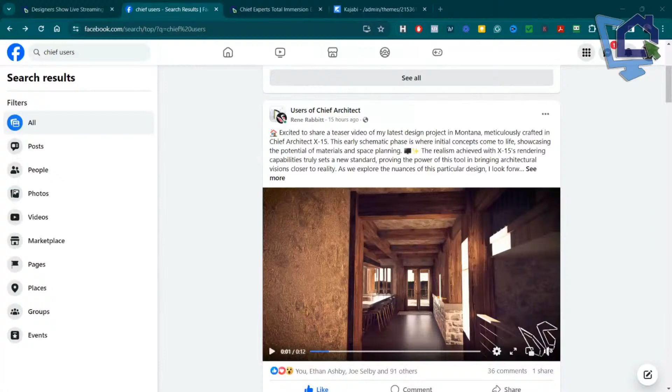Let's just jump right in. I asked Rene if he wouldn't mind talking about this a little bit. I don't know what's the best one of these to do here. Do the overhead one because you got a wide screen.

So Rene, you posted this. When did you post this? 15 hours ago. Let me just play the video. Really cool, it's just 12 seconds long. Now this is exclusive, huh? You did this exclusively in Chief Architect? Yeah.

So look at that. I did put a filter on it afterwards, but it was rendered in 3D. What do you mean a filter? Just like an Instagram filter kind of thing, where it's changing some of the softness and color hues. It puts a little bit more blue into the shadows, for one. That's really phenomenal, I mean it really looks good.

Depending on what kind of device you're looking at it on, it's going to seem a little darker. On my phone it seems darker than it does on my computer, and if I go full screen here it really shines. I'm gonna be switching to Android and have that darker image for me too. Okay, iPhone just shows it super bright. Oh really? Yeah, so it is device dependent.

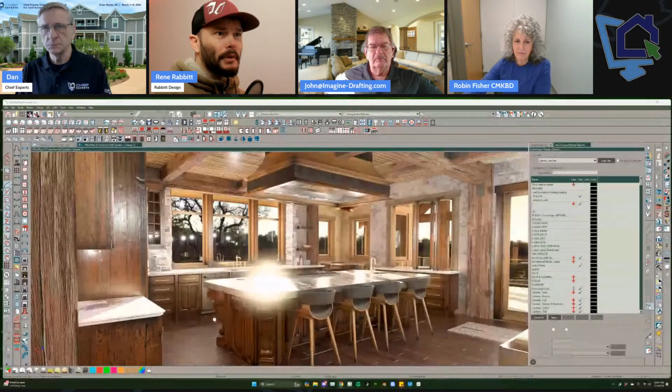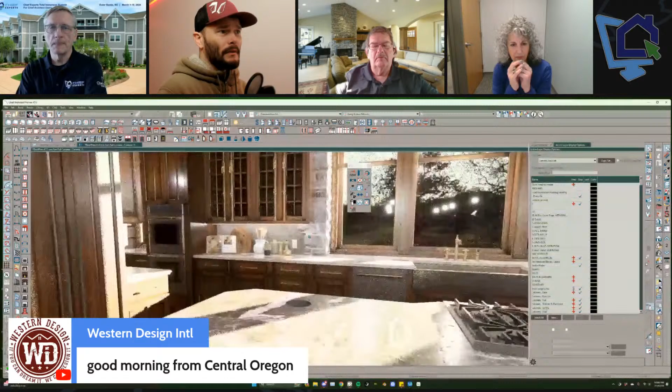Well, here, I'll put it up on the screen. This is actually a collaborative work, and they're in the show right now. Here, this is them, Western Design International. What do you mean collaborative work? So the initial layout of this kitchen is from Western Design, and then I'm coming in to do just some refinements. And this house is gorgeous. I'm not prepared to show the whole house, but you've seen maybe 8 months ago or so, I did a rendering of the exterior of this house. Oh there you go, yeah, it's an incredible house.

Right now I'm just set up to render in the kitchen only. Looks a little bit like the house I did in Texas. My process is such, I don't feel like I'm great at visualizing design until it starts looking realistic. So unfortunately for me, I have to start making materials look realistic before I can even start working, and so that was the process here.

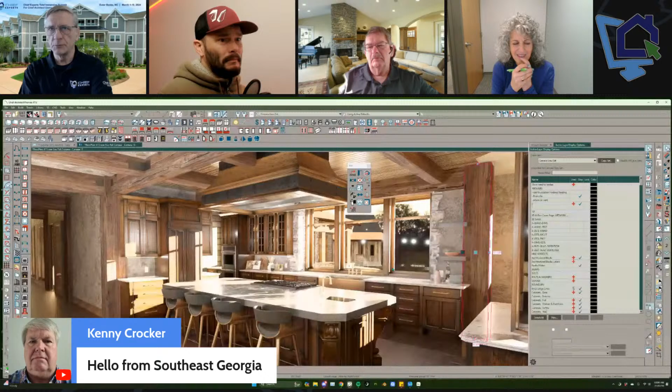I know you are a Photoshop guru. Do you dress up some of your materials in Photoshop before you render? Oh yeah, and I don't think there's a material in the scene that wasn't one I created myself, in this particular one. I was having some fun with it. I kind of picked the hood to start with, because this hood started off looking somewhat similar to this from the get-go, and then I just started putting more detail into it. I did a whole video on how I put together this hood.

So this hood is actually a single fixture now, and it's a fixture as a light, so it actually projects light. If you open it, it's an electrical symbol, and there you go, you can see that there's light sources on it. Have you tweaked the light sources on that? Oh yeah, so we got 3 lights, and they're lined up with the actual lights on the hood, so that's kind of cool.

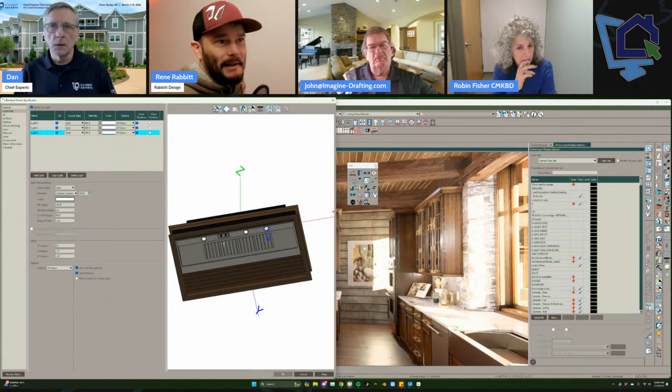And then I mapped it so that it could have a bunch of different textures. So part of the realism in this shot is that even though it looks like I only have maybe 2 or 3 wood textures in here, there's actually like 10 or 15, and they're all just slightly different from the next. Are your beams all one texture going, and they automatically switch direction? There's 2 textures in the beams.

So one is slightly different in hue and offset than the other, and even on the hood itself, this section is a different color than this section, same thing with this inner portion. They're all just slight hue changes, and that really adds to the realism.

People are always asking, what are your lighting settings? I only have the under counter lights on in this scene. So there are no lighting settings, this is all materials. And that's what you've been saying, that you get a lot of lighting effect from materials. So what do you do in the material to adjust that?

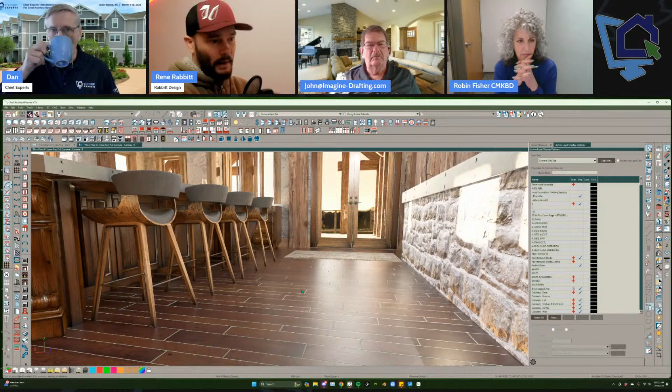We'll give an example, just this flooring. I generated this floor, there's a problem in it right now and I can explain what that is, but I generated this flooring using Dustin Cruz's Substance Player that he's got on Chief Talk forums. When he was first making that, I asked him, hey, can we get a picture input, an image input, so we could take wood off of the internet, a picture of a slat of wood off the internet, and chop it up. So that's what this does.

Here's a quick trick to address right now. If you have a high enough bump or normal map in your flooring, what's going to happen is the surface underneath is going to show through. And that's what's happening right now, is the reason these are all light, because the surface underneath this floor is actually showing through.

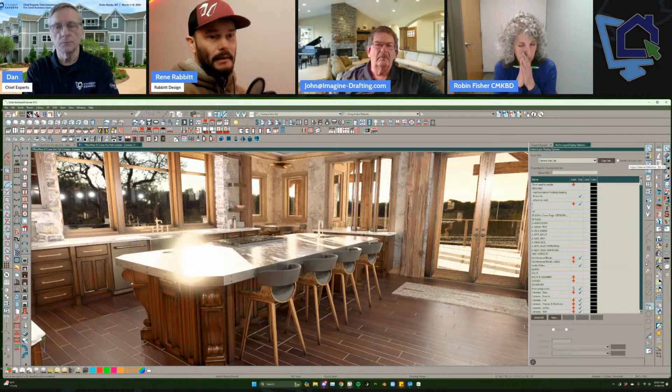A normal map or bump map is kind of an image that sits on top of the photograph of the wood, so it's a stack of things. A bump map would be a grayscale map, black to white, where maybe black is an indent or depression, and white is a raised surface. So that makes the slats stand up.

And then on top of that, I'll put in something. If I just get in where I keep my materials on my computer, I'll put in any number of things from various locations where I've always got generic bump and normal maps. Here's where I might put in a wood texture into the finish of that material. I'll show you what it does real quick. We'll take the material picker, we'll pick this up.

For a roughness map, the black, it's also a grayscale map. Black is going to be true gloss versus white's going to be a matte finish. So if I go in here and pick something with kind of strong contrast black and white, I'm going to pick this one, you're going to see this show up real quick as soon as it finishes. It has all the knots in there. And so as the light hits it, parts of this are going to become gloss.

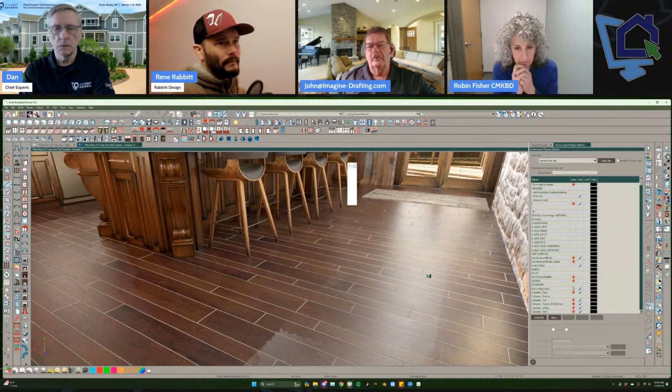How much time do you have into that, Rene? I spent 2 days working on this.

So there's that bump. You can clearly see those are the rings here. And something to keep in mind, the resolution of the original texture, you'd have to have a texture that matches that resolution, or understand that your bump map's going to get stretched according to the resolution of the texture map. So the bump map I just chose is a real small truncated image, and it's getting stretched because the main map is a different size.

Got it. And then just to mess around and show you what happens here in our structure, floor finish, let's look at what's happening. You see this foam right here? Let's see what happens if I just change this material. Sorry, this stuff moves slowly when you're working through it.

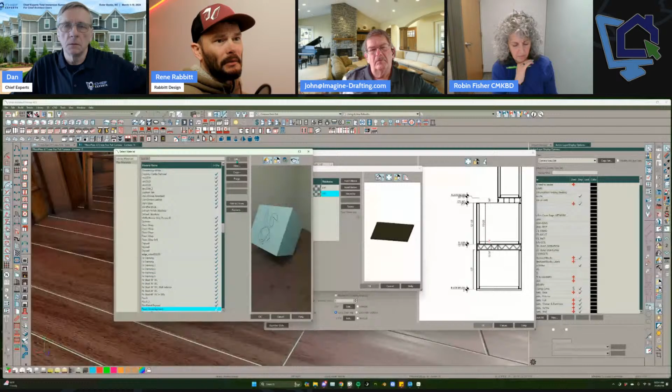Probably because I'm in a ray trace mode. So I'm going to edit this material in the pattern section, and I'm going to just turn it black. And now that's my new surface texture, going to be black underneath this flooring texture.

Here you go, Rene. Comments. That's super funny, I agree with you, John. Most of the time I'm like, you're up here, bring it back down. There we go, you see that? All right, we all feel the same way, John. You're not alone. But it's fun to see this stuff, to know that there's this kind of crazy stuff going on in the background. And thank God we don't have to know much about it. So we have guys like Rene that are going to take care of it for us. Yeah, come hire me. You changed that bump map for that area.

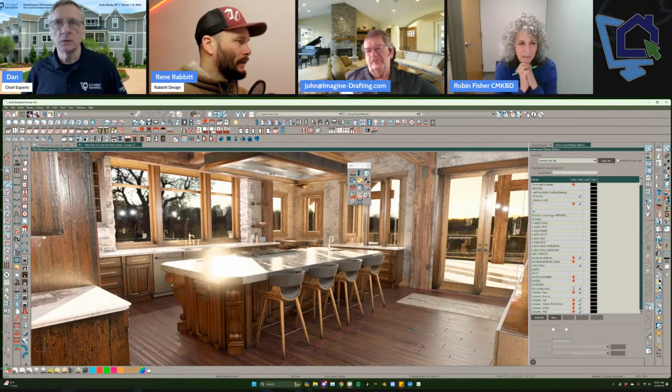Is there a way to show a different pattern, different bump map for another plank right next to it? Can you put two bump maps in the same material, or no? You'd have to split the floor, put a floor material region in there or something like that. Which we showed last year at the summit, how to do a banded edge inside. Yeah, we talked a lot about that stuff. I almost just do it in camera view, where we're picking a slat and then putting a material region and matching the slat of the floor to actually do a banded edge, to get the width and that kind of stuff.

But it's cool to see that Chief, I mean, is really getting there. This is pretty amazing. Well, big hats off to the Chief dev team. I love the team that does the rendering, and I was talking to them in Idaho. I had a big back and forth with them over a series of months just about rendering stuff coming in next versions, and I'm super excited to see what happens at KBIS. I want to see it actually implemented. Yeah, so this stuff should only improve in the next version. Yes, absolutely, and hopefully be user friendly. I know you guys are speaking a foreign language, but yeah, user friendly. Yes, all right, so cool.

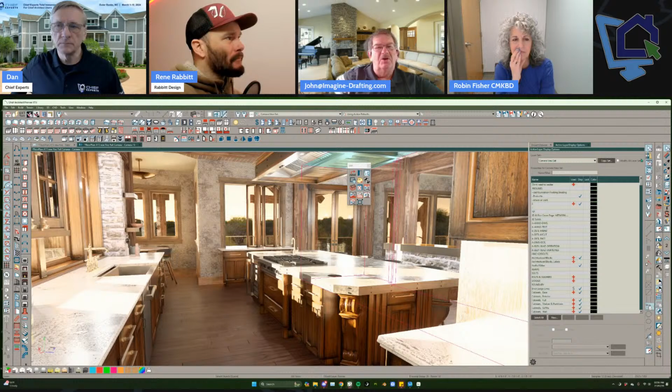Rene, one of the things I struggle with when I'm trying to do something like that is hunting for stuff in the library. What do you do to keep it straight so you don't have to search all over the place to find what you want? I make sure I put search attributes on everything. So if we're zooming in on my library browser, if I type in RD Wood, which is Rabbitt Design, that means I'm looking at my own textures and it shows up pretty quickly. These are things I've made. So that's part of us taking our brain cells a little bit further when we're picking out that favorite toilet we like to use. Let's tag that damn thing. Tag it, putting it in the library and keeping your library straight so you can find it.

Well, you don't even have to do that, you just tag it. Can you just tag it? Yeah, you can tag it. Tag works. I do what I call a stacked tag. So my stuff is all — if I want flooring material for interiors, I'm going to click on interior, I'm going to click on floor, and I'm going to click on material. And it's going to get me there.

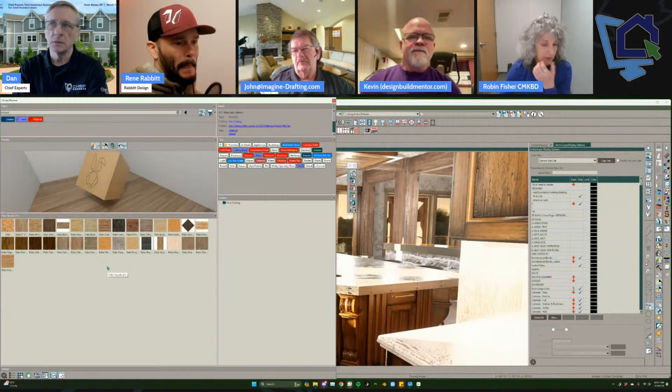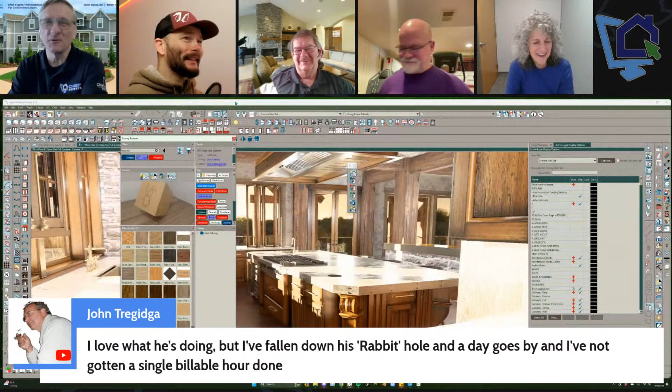All right. Look what I've inspired. Yep, I love it. Nice. No, this is cool, thanks Rene. We need to move forward. So yeah, organizing your library is just — I keep forgetting to do that myself. I go look for a toilet and it's like, god dang it, why don't I just, because I use it all the time. Yeah, stop and organize it. Well, and just get in that habit.

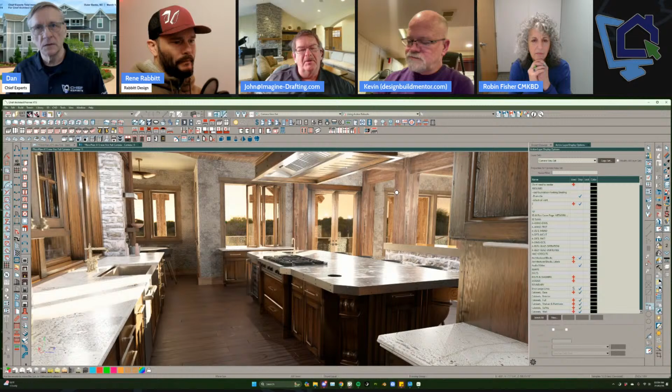Since we're talking about the library a little bit, pull up your plan, because I'm starting to think about using the library in a different way. I don't know if anybody else is doing it or not, but can you pull up a plan, Dan, or just draw something quick? Sure. I'm starting to use find in library a lot more. Let's see that function, yeah.

So you want a new plan? So what do you want to do? So just grab a wall and go to find in library.

This one, bottom right, this one's the magnifying glass. Yep, this one right here. So it's going to ask you to put it in the library.

You probably don't have it in there. So if I put it in there, that brings up my library, which I have expanded. So one thing, if I put all my wall types that I want to use in my library under a wall tab, it will open up that tab so I can just go there and grab my wall.

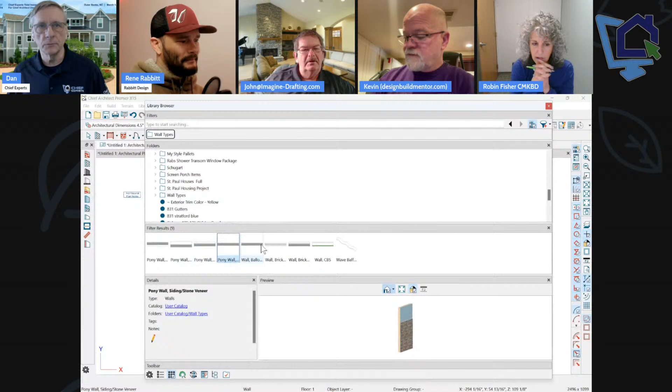Right, so there's my other walls. Yep, so but if I'm going to use the find in library, I have to work from my library all the time. I can't go up to the wall tool and use that.

But as soon as you click on that, go back to the plan now and click on the middle wall and find in library. Oh, find in library. All right, and now start drawing. You ready to go? Yeah, because it opened it in the library here. It opened it in the library.

Same thing here, if I want to use this wall, I find in library. That's clever, John, I like that. Yeah, so then since it opened that tab in the library because I clicked on there, found in library, so if I do that one, now I'm ready to draw. And if I do this, hit find in library.

I thought I did that. Thought I did. Oh, well. Well, you selected a different one. That's why I say you have to work from the library if you're going to do it.

Oh yeah, so I should select the same wall. I should be selecting my walls from here then.

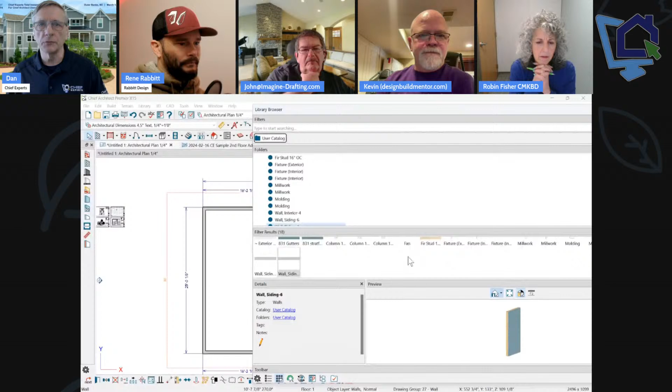Yeah, right, okay. But you don't have to open the library because you can select a wall that's in the library and find in library. Sure, and then it brings you to that tab. So then you can change the wall that you want to use and start drawing with that wall.

Yeah, nice. The other one I do kind of the inverse of that, but I'll draw a new wall and I'll just set it as the new default. Then I'll go back to that, but that takes one more click and work to do. I mean, that's one thing, I'm trying to get rid of clicks, right?

Well, wait, no. He would just click on set as default in the toolbar. Oh, I see what you're saying. So, if I'm saying, so I keep flipping defaults.

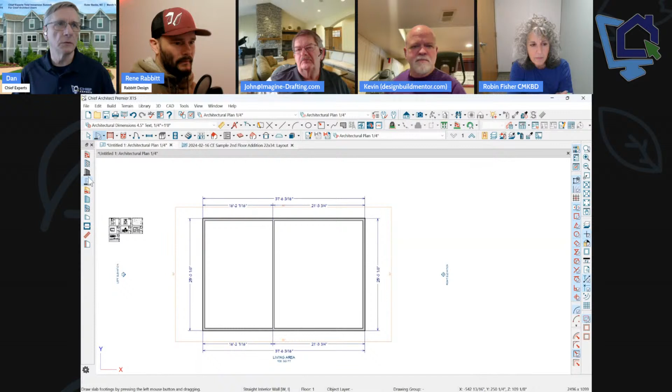So if I switch my interior wall type, well, let's go add another type of wall. I'm just screwing around here. So there's a foundation wall, but I want that to be my new interior wall type, so I can draw more interior walls. You'd have to have it drawn in the interior though. Oh, that's right, I forget about that.

Right, thank you. The other thing you can do, if you highlight that, this also brings up doing as-built versus new stuff. You can take that wall and make it an as-built wall and put it on your as-built layer, and it will be on that layer when you put it in there.

I'm a big fan of putting interior walls on a different layer than exterior walls, so you can turn them all off. You can do that too. Yep, yeah, I do that too a lot.

Here's a big one for me, Dan, when I'm working through as-built. Select your interior wall, the middle dividing one. Open that up. And then right there where it says thickness, just add 2 inches to it. Just go plus 2.

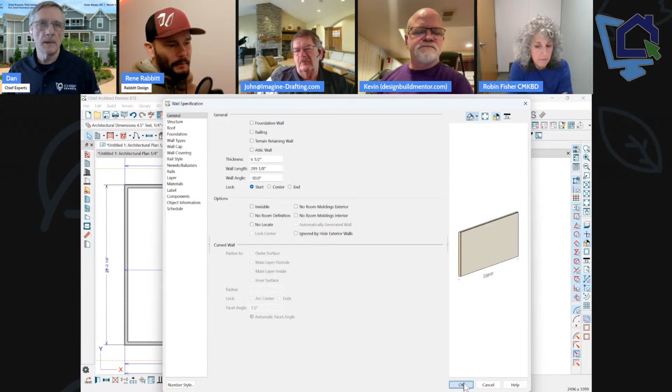So for those that didn't know that, if he presses OK, that now generated a new wall called interior 6. And that's when I'm like, I'll set that as default. Now I'm just drawing with interior 6.

And then I can... so why does it do that on an interior wall? But if I do that to a railing wall, it doesn't change the wall type, it just adds the thickness to it. That's interesting, I didn't know that.

Yeah, so like if you go out and put a railing on here and you want to do posts, and you want the post to be set back a little bit, you would just take this wall type and add to this. If I make that 8 inches, for example, it's not going to change that into an 8-inch wall type, but it does. Let's look.

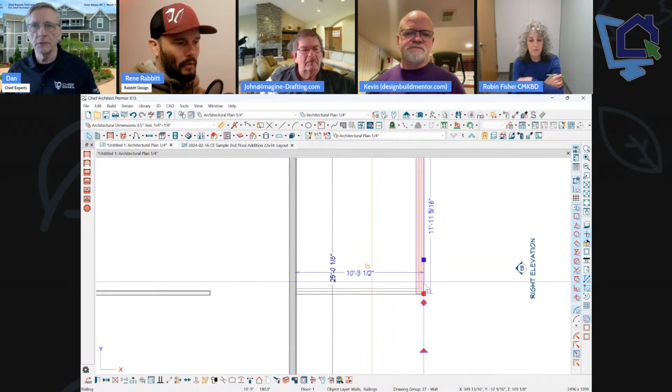What is the wall type? Let's see. Well, I had railing selected. So the wall type, yeah it changed. Look, it really changed now? Interior railing. I didn't know it did that. I just learned something new.

So are we done with the walls like that? Because I have another issue I want everybody to let Chief know about so they'll change it. I thought we were spinning wheels, not dealing with issues, John.

No, go put a window in there and do the same thing. Put the window in the railing or the wall. Put a window in the wall. Add that to find in library for your window. Add it to your library.

But see, every time you click on it, it's going to come up with this menu. I want it to at least hold the window and not bring this menu up unless I want it. This does this with any fixture - it brings this up instead of just grabbing the object and letting you use it. You have to select what attribute you want to use because it's adding it to the library first.

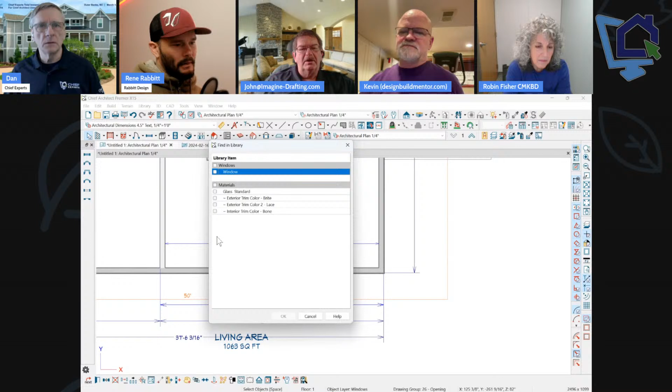Well, it'll bring it up when you do it again. Let's just do it that way - put it in the library. Okay, so now it's in my library right there. Yeah, that function comes up because I use that all the time for cabinets where I'm working on other people's plans and I want the cabinet door that they used.

Well, so it's just like your walls - you'd want to be working from your library to select that window. So can you put a window in there from the library and see if it'll let you find it in the library without bringing that up? I just put this one back in. Now select that one and find it in the library.

Yeah, the same thing - see, it brings that back up again. Yeah, I don't want it to do that. Well, then don't use that icon.

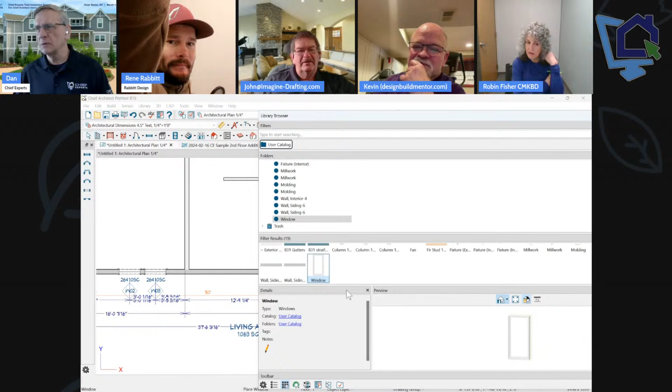But it's so handy. I can select that window, find it in the library, and go to the next floor and put it in. Yeah, no, I get it. Well, there again, wouldn't you just work from your library of windows? Well, I suppose if I had it open all the time, but this actually sorts my library when I click on it.

If you changed it, if you put your tags in there, you could do casements, double hungs, those kind of deals.

Yeah, I haven't been paying attention to the comments. I hadn't seen if anybody's saying anything here. Okay, anyway, all right, cool.

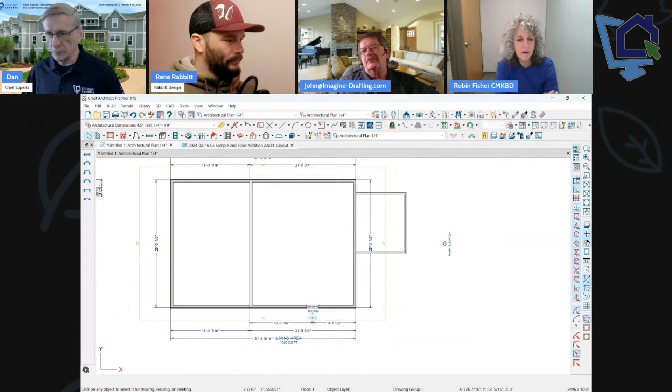I suppose we could just keep doing this kind of stuff. Let's go spin the wheel because I put all this cool stuff on there. Yeah, you did. So no icons today - let's just do this and spin it up and see what it lands on. No icons, you're slipping. I know I am.

All right, as-builts. What did I want to say about as-builts? I made notes on that so we wouldn't forget. Where did I put my notes now? Here it is - as-builts. Anyone using Canvas, Matterport, or any other scanning software?

Matterport just put a big update out that I didn't get a chance to watch. Any of you guys see what their update's all about? What's new? No.

Let me go to the website real quick and talk about this for a second. If anybody's used the new Matterport or had a chance to try it, they have a really cool feature where you can click on a room and it shows you all the dimensions around the room, height, everything, just by clicking on the room.

So this could be huge. They're getting dimensions on there now, so we don't have to go measure everything. That's cool. I really like that. So if you guys check out Matterport, if you can find someone in your area who can use the new Matterport 3 camera, have them go scan something.

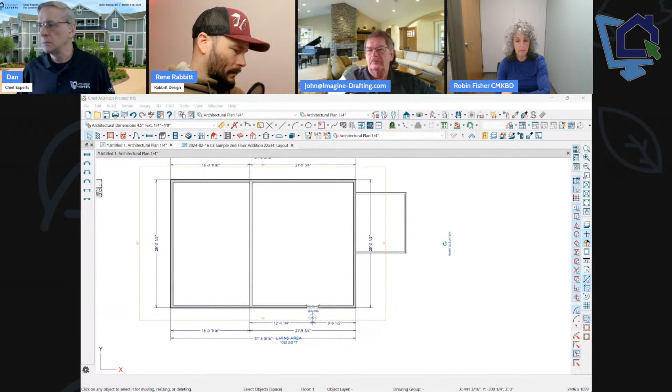I have this, I've only used it a few times, because I go measure on site and draw it on site, I don't really need this. I have it in my contract that says you have to do an intake form with me and tell me which floor is priority, because I will prioritize that floor over every other floor. So if the dimensions are off from floor to floor, I'm going to pick one floor and say everything's going to be built off of this one.

Makes sense. Cool. It'd be great if one of us got that Moasure device so we could start sampling it at the summit. Chad has something different, I think. I haven't tried it, I think Chad has Moasure too. Does he? Okay, maybe we can find out more about that at the summit. Chad, if you're watching, bring it. I don't think I saw him on here yet. Okay, well we'll talk to him, I'm sure he'll bring it.

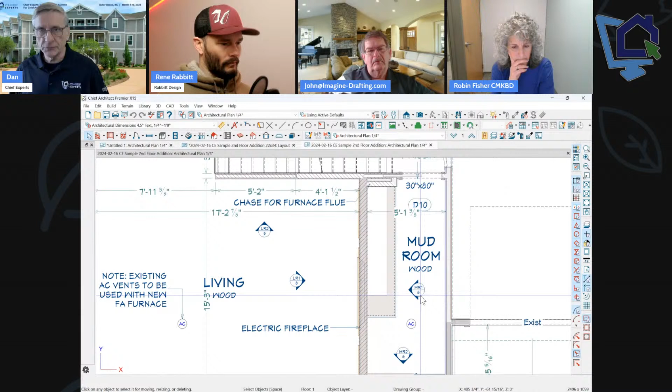The callouts in Chief are used to find things in your plan. So if I'm on my floor plan and I'm looking for an elevation of that mudroom, I'm going to go here and say, using the initials of the room, mudroom 1, and it's on page 6. So mudroom 1, page 6. If I go to my plan, go to the layout, there it says mudroom 1, and down here it says page 6.

So I'm not going to duplicate that page 6 in the callout here, I see that a lot, but I don't think it's necessary in my mind. What do you guys think? No, I don't think so either. Right, so just do that.

So anything that's got an elevation or something that needs to be found somewhere in your plan from the floor plan, like MR2 on page 6, section 4 on page 14, section 1 on page 14, living room 2 on page 6 - those give us the indications on our plan where those details can be found. Callouts are fairly simple in their sense, but there's still people that don't quite understand what they do and how they work.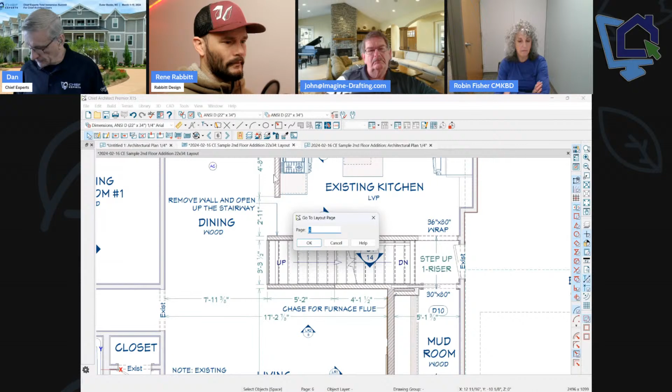The key with Chief is we want the page number to always update automatically. If I were to go to page 14 on this layout - here's my sections, section 4 on page 14 - I'm going to click on the page number and I can type in the page I want to jump to. Here's my page number.

So now if I go into my pages here and decide I want to add a couple pages in here, or move this page down to after page 16, now the page number is 16. So when I go back to the floor plan, now that callout will say page 16. It's automatic, so I don't have to keep track of anything to keep my callouts up to date.

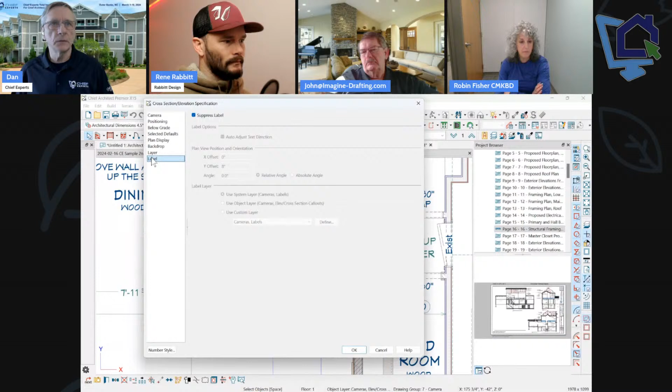Does that make sense? Now, if we look inside a callout and look at the dialogue, the way you make that happen where the page number is automatic - you're going to go to... hold on, where am I again. I'm going to go to camera, and then plan display, not label, plan display. What shows up on my floor plan?

If we look at this menu, I've typed in S4 right here, and that's what shows up at the top of my callout. This one, I typed S1 into the top of that. But the page number is set to automatic.

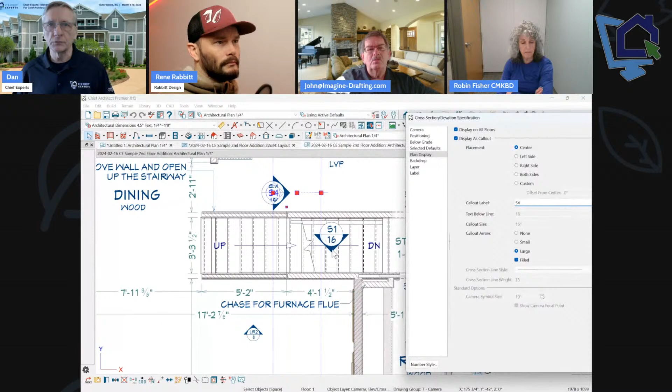It's set to automatic. So there's your page number, you see it says 16 here. I didn't put that there, it's automatically put there, and that's what will show up in the bottom of your callout. So where does that page number come from?

So if we go back to the page where that callout, where that section is, if I go here and click on this section and open its dialog box... no, I don't want to go live, I want to go edit the page. So I'll right click on that detail, and I'll edit. Well, this is the page, okay, this is the page number.

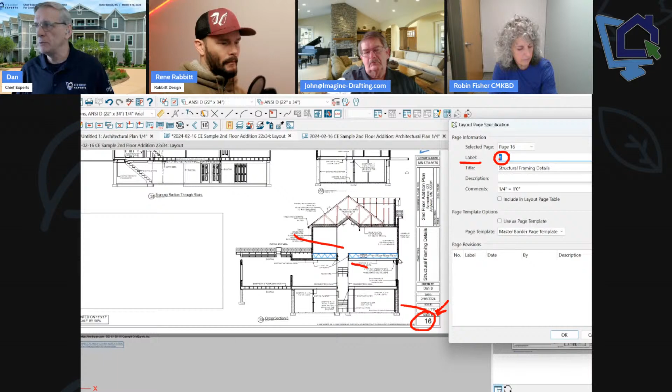Okay, here's another question I want to ask you guys. Here's the pound sign in this box right here. It's a macro - this page number is driven by a macro, and when I put a pound sign under label, it's going to automatically put the page number in there. If I put an A in front of that pound sign, it'll go A123. And if I put an E in, it'll go E123 - it'll start the page numbering over automatically. So you want to watch that pound sign.

So if I go back to my page 0, which is the master - pound dot 1, pardon me? You could put pound dot 1 and it would be 16.1. Yeah, exactly.

One thing I haven't figured out yet, and I'll ask you about this, but here's the macro that runs that. So if we go to macro, it's layout page label - this is the code that we put in this box, the text box for the page number. We can adjust that just like any other sized text. You can do multiple callouts in the same thing. So that's how we get the page numbering to work automatically.

So when we go here, page 1, again if I go edit the page information, it's got a pound sign, so it's putting that in there automatically. So what do you guys do?

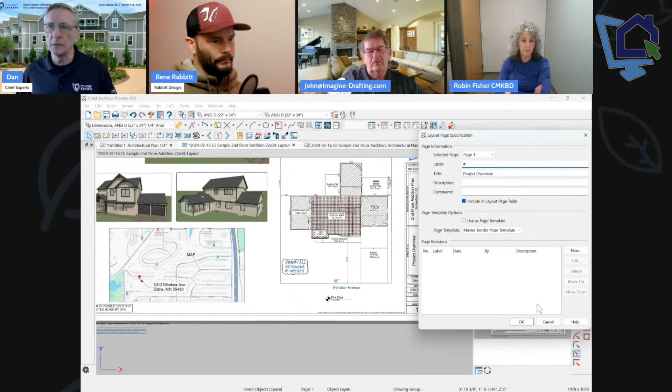I've had a few contractors this week - kind of weird that they kind of popped out of the woodwork, but they want to use like 0. I have one that wants to use 3 zeros, they'll put like 1000, no, A000.1 or something like that. Well, it's because of how they're managing their bookkeeping, so it all matches. I have one jurisdiction that requires that - one specific jurisdiction in Oregon.

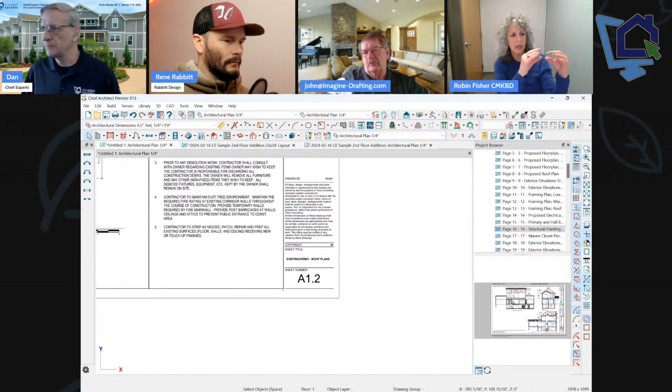So it's a bookkeeping thing? Yeah, because it has to do with plans being on this phase of construction. It's how they keep time tracking, and that's why they're doing it. So electrical has a different number, cabinets has a different number, HVAC has a different number. So that's what they're trying to do, and that way... it's just confusing. But obviously it was an architect or an engineer who started it.

Sorry Richard, I know you're here - no slam on Richard, no slam on architects. But it's a guy in Hawaii, right? The guy in Hawaii that uses the 3 zeros. Right, and he says that's the way the city wants it.

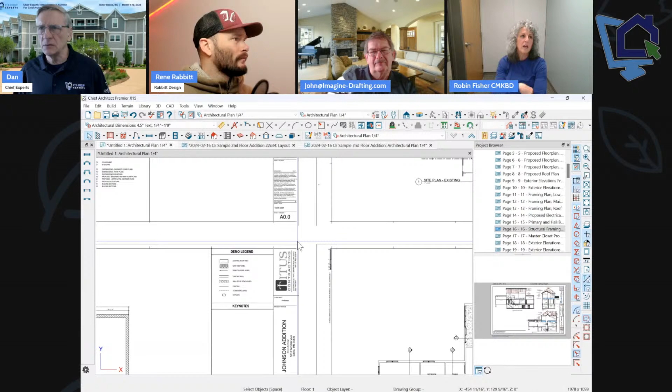Well, like I said, I just do interior design, and I have one jurisdiction that requires you to use letters and a specific numbering system. Yeah, I could see that for tracking. Would that be for tracking your time put into the plan, not necessarily building the project? You wouldn't build a project with those numbers. Yeah, well no, they do - the employees would, they put like when the electrician's on the job, the electrical has a specific number.

And then one dot after that might be 16.01 - that might be the design. And then 0.2 might be the materials, 0.3 might be the labor, and 0.4 might be the permit. So I know I'm probably not explaining it incredibly well. No, I get it. That does give me an idea of why they do it - I've never understood why they did that.

Let's just move forward here quickly, and talk a little bit more about callouts. Got a question here - yeah, and yes, it is Washington County, whoever's asking that.

Can the same call out be on multiple levels? Yes, you can do it with cameras. Can you do it with an actual call out? Yeah, call out's just a tool, like text is a tool. You can put it anywhere and link it to whatever you'd like.

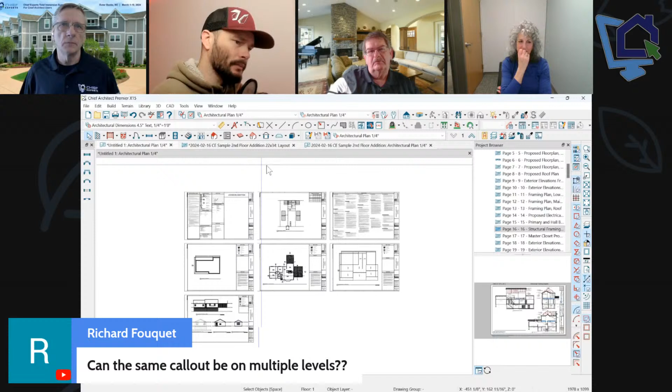So if we go under the call outs here and we put a call out in and we label it, where is that? It's under... Well, and this answers the next comment too. Mike says, would it be nice if while looking at a detail to have a reference back to where this detail comes from? I don't know if he's talking about from layout, because we would just double click the layout box and that'll take you to the detail.

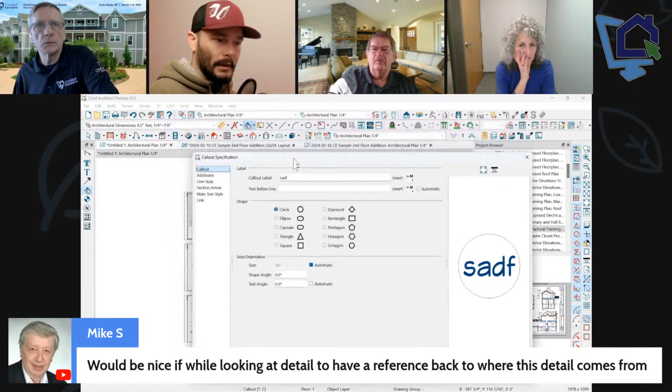But you can also place a call out and link it to a CAD detail, where hopefully that's where you're putting your CAD details to be sent to layout. So you can link a call out within a plan view or a section view, and link that to a CAD detail. So a typical text call out doesn't have the same options as a camera call out.

It has all the same options, it's just a different dialog box. It doesn't have this one, does it? What's that? Display all on floors. No, yeah, that's part of a camera call out. Gotcha. But the plain call out, I'd never noticed this before, but I just did that. Now attributes got crossed - it doesn't have that option above here.

Yeah, so what I would do if I needed call outs on every floor, I would copy, paste it in place. So you place a call out and link it to a CAD detail so we can show that we can then navigate to that detail? A plain call out, yep, not a camera, just a regular call out. Yeah. So if I'm placing that on the... and press OK.

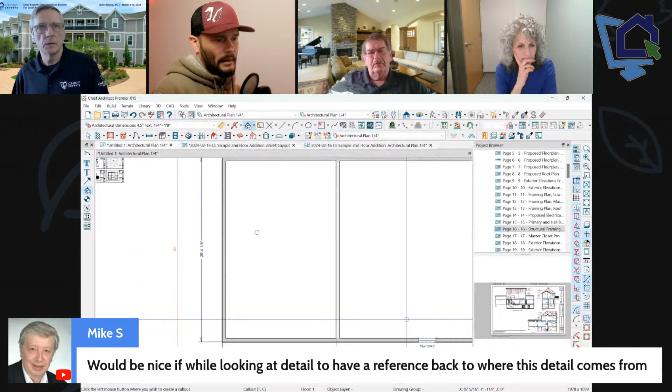Okay, and now link that - you can show how we can link this after the fact. Let me remove the comment down so you can see. Yeah, we have an icon down here that looks like links on it. So what are we linking that call out to? I've never used any of that tool. One of your CAD details would be good. So if we go up here, I have some CAD details here.

Let's see, let's go to this one, it has more CAD details. So if I have one like that, I could link to that, or a schedule, or anything. So there we go - I've linked that call out to that detail.

So now we're in plan. So if you just double click that call out... So if I go, I'm going to make that call out number A, this is where I would put the page number. Well, no, here you can go drop down your macro, text below line, go ahead and drop down a macro just to show this and go object specific, and you can say that it's linked view layout page label.

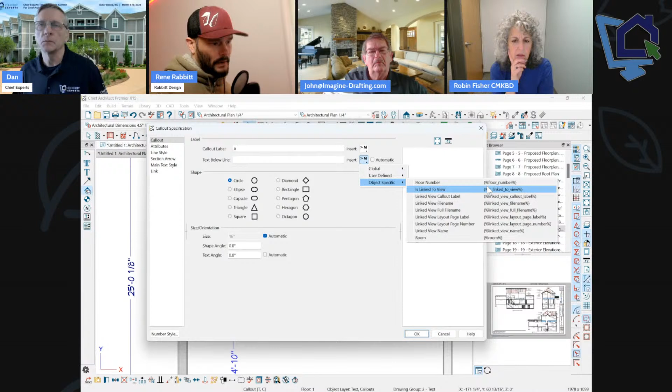Oh, there it is. Yeah, okay, that's where your page number would be - that's the pound sign. So if the detail gets sent to layout, now we're linking our label to that from this call out.

Cool, I'd not used that before, I'm glad you brought that up. So again, that detail is - what did I link to, that cross section? Well, so double click on it, double click your call out, that'll take you there.

So here's my cross section. Now send this to layout. You'll delete it later? Sure. God dang it, Rene, I just learned something new today. This is really cool. So send that to layout.

Now go back to your plan view. There's that detail. Okay, and here I would change the call out type - that's one thing I haven't figured out yet, is how to set up my template, so when I bring in this versus a floor plan, the call out type's different. So here I would go to my label and I would switch to this edit.

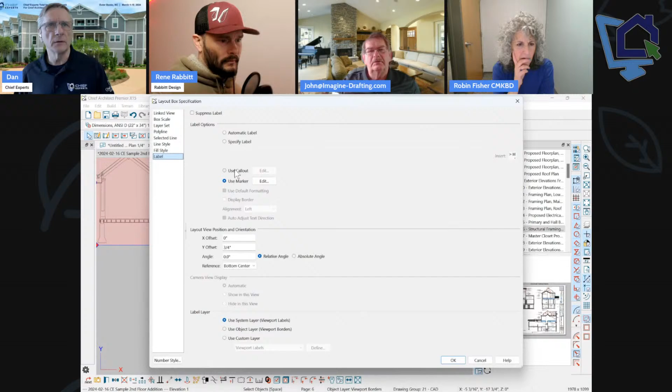So now I'm going to use, now I'm going to have that. Once you put that call out in, you can just copy it and use it somewhere else, and then just change the stuff on it. Copy the viewport and change what's in it?

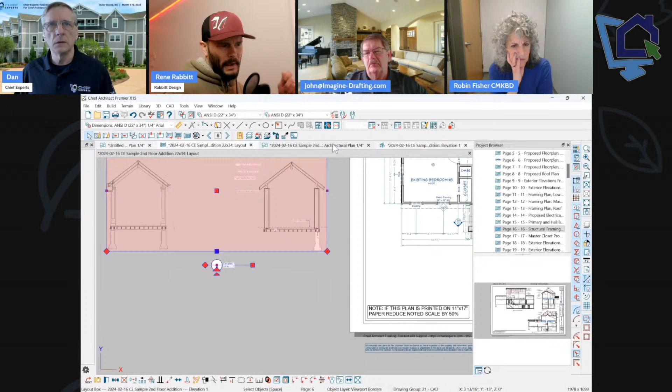Okay, Rene, what were you saying? Go back to plan. I think we just messed up the label though. Let's find that call out that we had.

Yeah, placed. Where did I place it? I don't remember, it wasn't in this first drawing plan. It was in your untitled one. Yep, there you go, right there. So there's your A6. Oh, that's right.

The A won't show up automatically in my call out. I do have to add that to the call out itself. On the page number layout? Yeah, on the layout. You have to do that manually with all your elevations. So I would go back to my layout.

I would open this, go to my link. Let's see, where is it again? My label and edit it. I'd get rid of this, I don't want the page number, I just want the referenced view callout label. What was that macro? Automatic label.

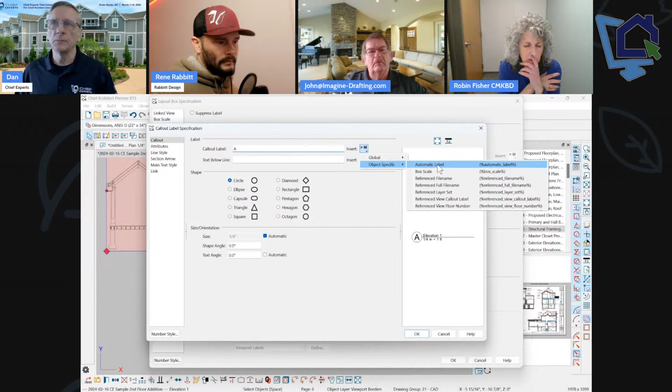Elevation, here, one. You know, I think I'm making a mess of it. I know there's a way to do it though, where I can put whatever label I have on my floor plan to read in there. I just don't know which macro that is right offhand. So if I go back to my floor plan, this one right here, I want A to show up.

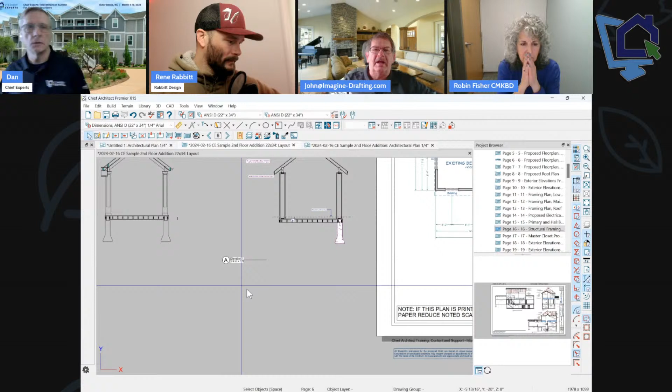ABC or whatever it is you want to show up in there. So let's go A1, and we're just using the out of the box macros. This can get infinitely more complicated. Yeah, I know, but it's cool that, again, my whole goal here was just to show how the page numbers stay automatic. So now I'm in my layout and I have 20, 30 different details.

How do I navigate back to the plan where that detail is being used? You're in layout, you have 30 different details. Just double click on them. Yeah, but that's only gonna take me to the CAD detail, it's not gonna take me to the plan. So what are you trying to find in plan? I wanna see where I placed that detail, I wanna see where I placed the call out.

Well, John, you know what would solve all your problems? If X16 gives us some dang call out schedules. Can you put a call out in a schedule? I think I pushed that harder than anything under the sun at the Idaho event. So maybe we'll see it two weeks from now. Oh, you don't know yet if it's going. Don't know yet, I don't know. Yeah, we'll find out. But Dermot was up there going, you know, that'd be pretty easy to do. And I'm like, alright, we'll do it. Done.

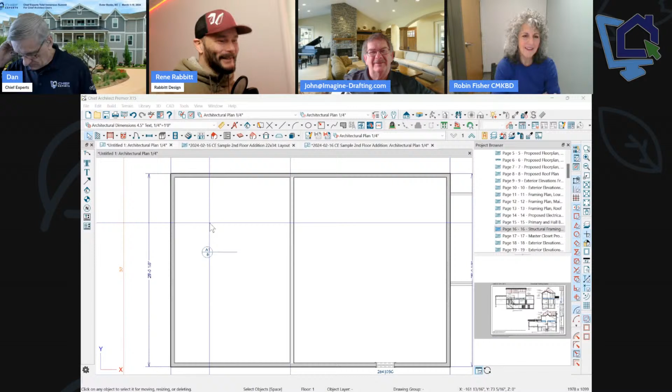Alright, the last thing I want to talk about with schedules, and we'll spin the wheel again, is the size of the text and the call outs. This could be, it doesn't really matter what page size you have, that's going to be the same. So what I like to do is, and you guys can chime in with what you use, for this and this I use 3/16 inch text. And then for this, I'm using the 3/32nds for the bottom text for the scale.

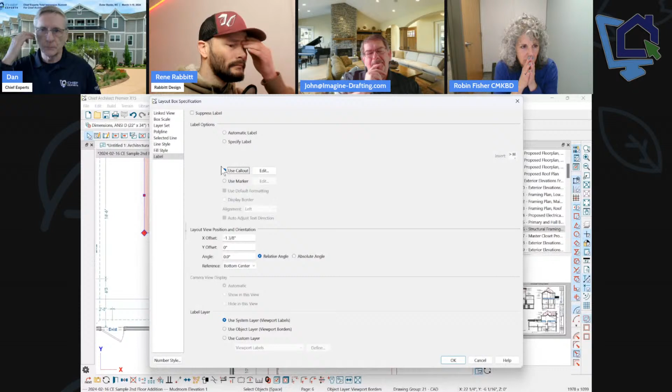And then I'm having my text go to the left, I like that look. So the way you do that is in the elevation or floor plan, depending on which call out you're using, the marker or the call out. I use call outs like this for all elevations in any view that I want to have a reference on the plan itself. If I'm using a marker for a floor plan, you don't have to use anything if you don't want to. I would go in here and under main text style, 3/16, that's going to control the text in the box. So if I make this a little bit bigger, see how it controlled that box, or the circle, I mean. So it's changing the text there.

I like 3/16. For the other attributes, we've got the text above the line and text below the line.

That's what these two items are, above and below. Here I'm doing the automatic label, picking up what I put in my camera on the floor plan. The MR1 is automatic, that's going to be 5/16 of an inch, and it's going to be toward the call out, not centered, not away from the call out. This item below is going to be the box scale, that's the macro we'll use there.

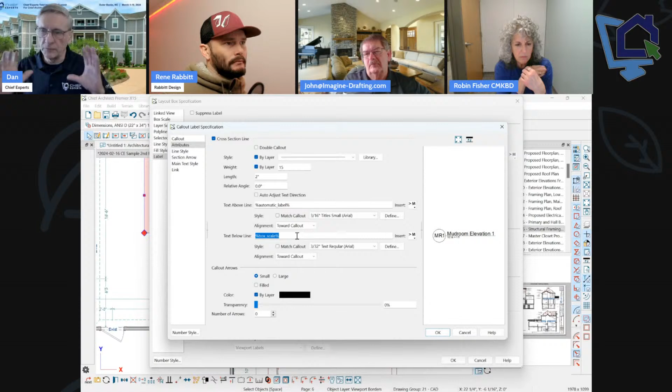It'll automatically put the scale of every viewport on your plan if you have that in there, and I like that to be 3/32 of an inch toward the call out. That's how I like it, that's my preference. If you guys are doing something different, I'd love to hear what you're doing.

I'll plug one of my products if I can. Well Rene, isn't that why we do this? Yeah, all right, sure, go ahead.

In my pro layout, which only really works with my pro plan, my labels look for a couple things. It looks to see, in the saved plan views from the plan, if it has the words framing or foundation or any number of things where we wouldn't want to have what story it is in the label. If it doesn't meet those conditions, then it adds what story that saved plan view is coming from.

I only have one floor plan saved plan view. I don't have floor plan story 1, floor plan story 2, I only have one. I've seen guys that have done that, and it just becomes a nightmare to manage.

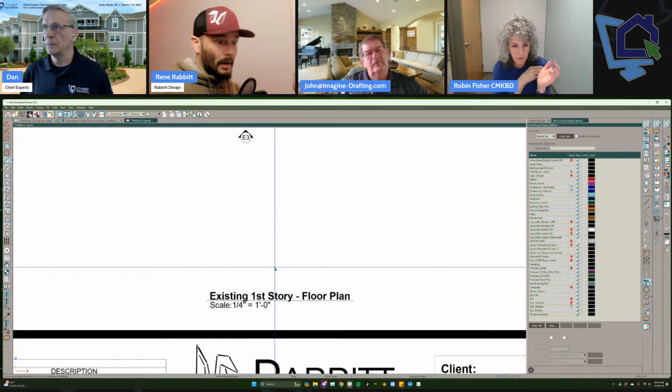I don't have to do anything because it's not linked to a particular floor, it doesn't matter what floor it's on. I'm not talking about where people have created a plan view for every floor, for every kind of different plan. That's really complicated. Yeah, it gets nuts.

And then this looks at the file name, and if the file name has AB in it, it puts 'existing' in front of the name. And if it has 'new' in it, it might put 'proposed', or just omits it entirely. You could do that same thing by just using the generic macros and having your as-built as an as-built or existing saved plan view.

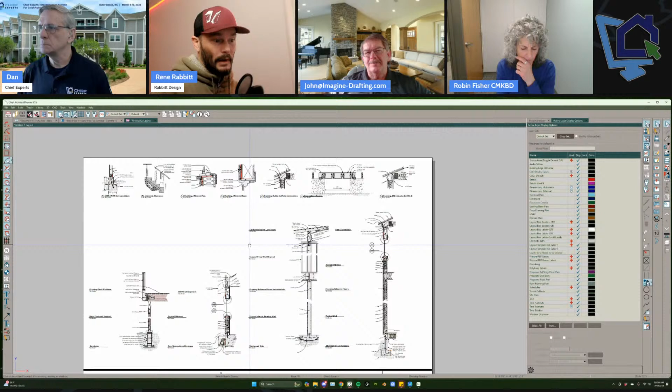And then you can also pick the floor that it goes on. Just keep in mind, I don't have to do anything except start a new plan and start drawing. The only thing I have to do is change the saved name of what it's linked to, so I don't have to do any other manual work. My labeling, I haven't touched it in a year because it just automatically generates.

So even this looks for the naming convention, and since I organize my CAD details by putting 'detail' in front as a prefix, this label looks to see if it says detail. Then it puts scale underneath, and if it's a detail with no scale, this is automatically generated. So I don't type any of this, it does it for me.

You just had a little bit, somebody said something. Where did that go? Let's see. They said, I love the Pro Plan and Layout. Rene, cool, nice, from the design guy, hey. That's Ken, we didn't even pay him for that.

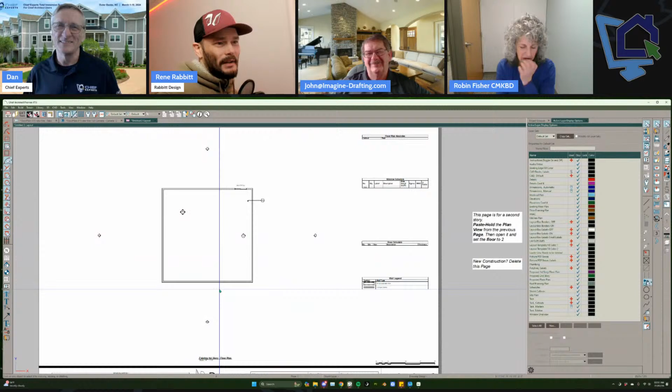We love Ken. Yeah, you can do some really interesting stuff with conditional macros, where it looks to see if it's a detail, and if it's detail, it puts no scale. If it's something else, it puts the correct scale. So I never have to type in my labels ever again. Oh nice, I love that.

Nice, yeah, all right, you guys, I'm gonna put you back on, we'll be talking about that. Let's go back and spin the wheel again, we're gonna hide that, Trish. I can see we're not gonna get through much of our stuff, as usual, we're giving lots of information. We can't do everything, come to the summit. Oh yeah, we talked about that, I did not program that in, you can't do it with this tool. So that just interjected, anyway, yeah, you can just leave that up there, Dan, so it comes up again later.

Oh yeah, there we go. I will hit it, I won't hide that choice. So let's spin it again. I was going to put that on there 10 times, but I decided not to.

Video cards, all right, real quick. I want you guys to know that if you go to Chief and go to Help, then Video Card Status, you can tell what video card you have on your computer. And I can't emphasize this enough.

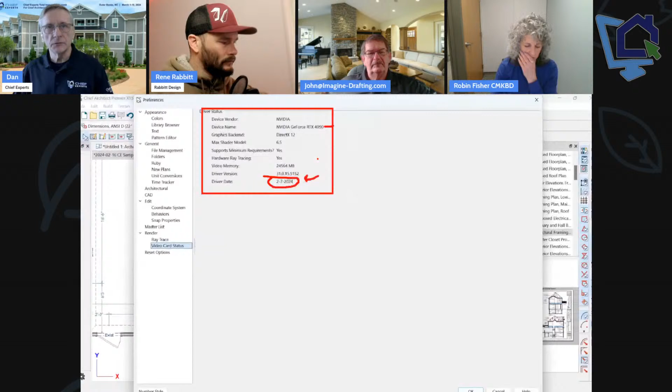Make sure your drivers are always up to date. This is PC only, not Mac. I don't even know what would show up here for a Mac. But it'll tell you what video card you have and what your driver date is. I just updated mine here today, February 7th, so that's the latest driver.

And if you want stable, everything's great. I haven't had any issues.

So you're going to use a software to do that updating. Let me go open up a browser quick, get over here. For NVIDIA, you'll want GeForce Experience. Just Google for GeForce Experience software, or just GeForce Experience.

Make sure you go to nvidia.com, and then you're going to download this software and run it. It will either tell you that the software won't work on your computer or that it will update your driver. I think I've only had one computer where it couldn't find a driver for it once, and that was quite a while ago, but this is how you would check that out.

Keep your drivers up to date if you have any issues with crashing or anything like that. So, you guys want to add anything to that?

And then if you're on AMD, is it different software? AMD Software Adrenalin is what it's called. Oh okay, I didn't know that. AMD is starting to make headways, aren't they? I have both - I have AMD's top of the line card and NVIDIA's top of the line card.

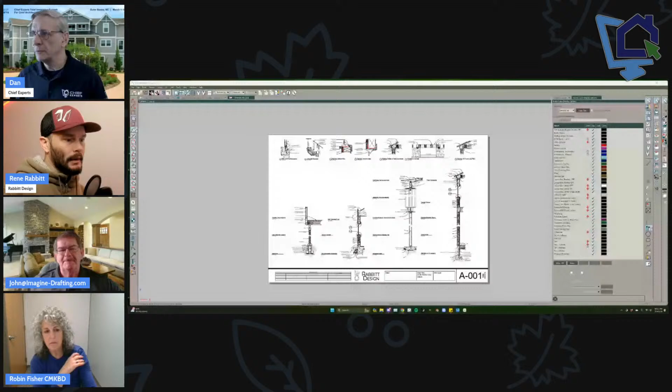Your settings are probably 1,000 and unchecked cap live samples and unchecked denoise when complete. If that use ray tracing - if you have a ray trace capable card and you're using ray tracing and you migrated, your numbers are 1,000 and unchecked cap live samples and unchecked denoise when complete.

Oh great. Yeah, I never do that, I never do the migration. It gives you a chance - you want to take that chance to clean up everything. If you migrate, you're migrating a bunch of old bad habits or mistakes that you've made. But if everything's working fine, then I guess go ahead and migrate.

All right, resize items. I don't know if you guys are aware of this, but we have a resize icon, the X.

Yeah, if we can share your screen? I can't find it, I don't see it. Where'd I go?

Oh, there it is. Did you find me? I got it. You got me?

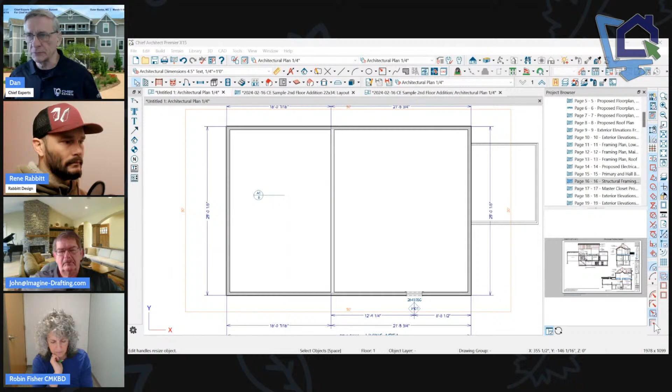Okay, thanks. The resize button is this button right here, or the X key on your keyboard. But Chief has added a function here.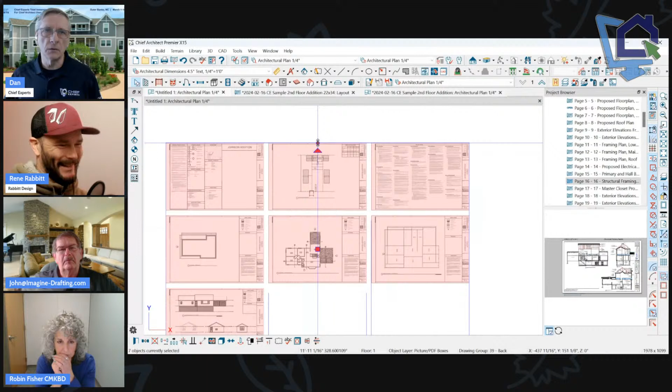So if you highlight something and either group select it or control select it, you'll see a dot and a triangle. Sometimes that triangle is covering up this circle, and that circle is a resize button. So if you hold your control key down and select, you can resize equally using that tool right there.

It's a handy little feature. I never even noticed that it was in there. One day I was saying, what's that circle for? And I hit it, and then, oh yeah, it's a resize.

So if you just select, it'll do it? You said hold control and select, or one or the other? Just highlight something and reselect it. You got to group select it, or control select it. Yeah, or if you're group selecting, of course you're doing that already. And then you can resize all at once.

So really a nice feature. I use it a lot on layout pages when I'm resizing images and viewports and things like that. So really handy - that little circle is what that's for. Highlight to resize things. All right, I think we got time for one more spin here.

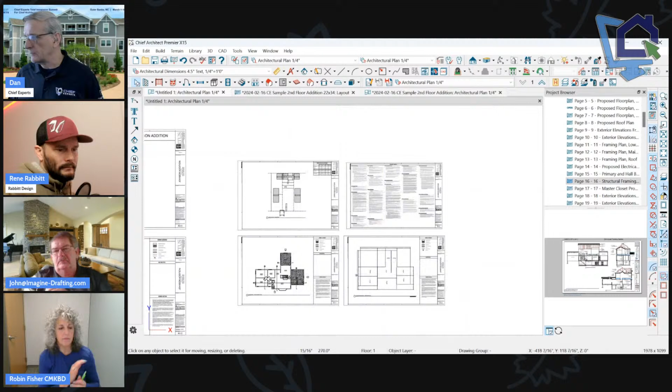Page numbers. I think we talked about that a bunch already. Again, page numbering is one of those things that when you're on the layout page looking at page numbers, you go to edit the page information, and the pound sign is the de facto default that'll put the page numbering in automatically. And then you can change the letters in front of this to like A1 or E1 or whatever you use for your naming convention.

Again, Rene, you were saying if you did like 001 or something like that, you're probably going to have some manual page numbering stuff. We can't do pound sign, I don't believe. No, that's not going to do anything - it just puts a pound sign there. So that would be the way to do it if we could do automatic.

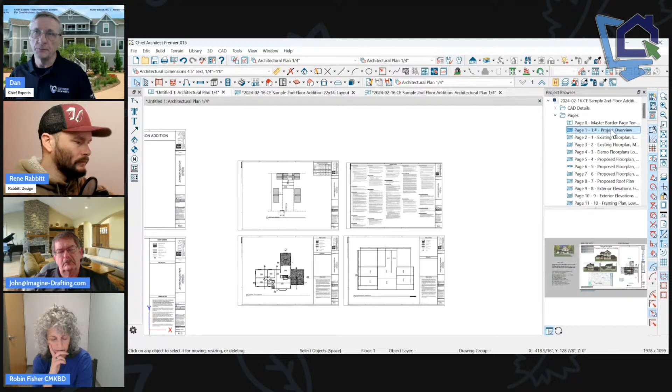We pushed for them to give us some automatic numbering macros. Yeah, so we'll see. Maybe, that would be nice actually. Because some of the firms that do that page numbering like that would be really beneficial, because then they wouldn't have to manually be changing their page numbers, which is still not that big a deal if you're doing it from this list.

So if you are putting 001 or 1A or something like that, you can rearrange them and then just edit page information and do that. Can you select more than one of those at a time and change the label all at once? Nope, you got to do them one at a time. You can delete them all or update the previews, but you can't do anything else. Oh okay, that'd be nice. Good question though, John, because I've looked for that in the past.

All right, let's do one more quickie. 1 o'clock.

Computers. Yeah, we already talked about that. Let's spin it again. Buy the best computer you can buy.

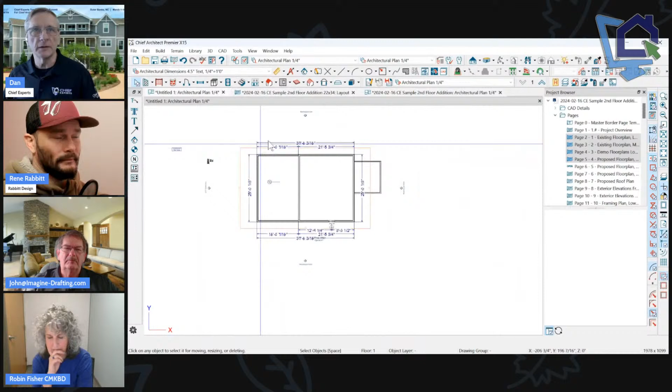Schedules. I love schedules. I see Robin's already getting excited because she loves schedules. I just wanted to show you a couple of quick things that I just discovered on schedules that are really nice - on my layout page, or in my schedules.

Let me just go into my CAD. I always keep my schedules in my CAD detail windows. Let's just go to a window schedule. So when you place a schedule, you can have one schedule in your plan per item - window schedules, door schedules, cabinet schedules. When you open the dialog for a schedule, you've got all these different options. The last option allows you to change how it shows up on the floor plan. None of the rest of these have to do with the schedule itself.

This last one is how you adjust what shows up on your floor plan and in your elevations. I've been experimenting with this on windows. I like to use both callout and label.

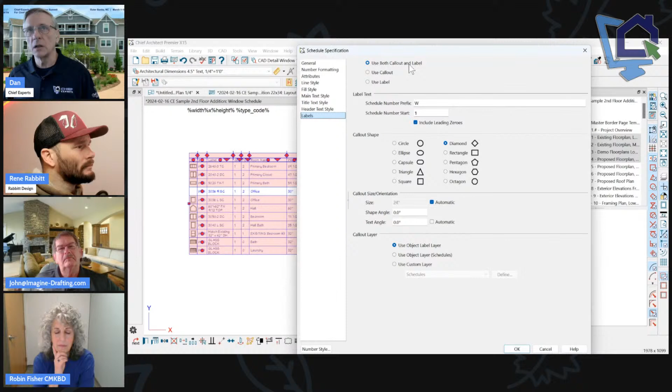So when I go to my plan, let's go up to the next floor. I've got a callout, and then I can customize that label to be whatever I want. I'll type that in, and it'll show both of them here. I've been getting some contractors that wanted to have both versus just having a plain callout. The doors still have that too, I guess. I used the same setup on this one.

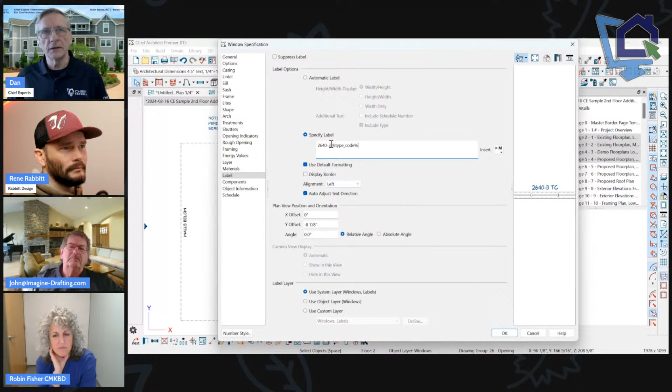That's just a matter of putting in the window settings. You do have to put in something under the label - I had to do the type code. I type this in, and then this is automatic. The type is the type of window. The callout's automatic, you don't have to do anything for that. So the type code is like TC for triple casement. All right, back on the schedule.

So that's what my label looks like - there's my callout and my label. I can see both of those on the floor plan, in the 3D view or 2D view. If you just shrink your column size, you'll make that more manageable. I like to do individual windows on certain plans.

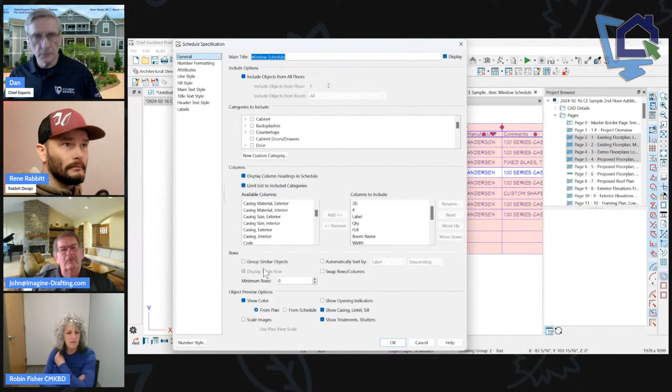If it's a new house and you've got mostly the same windows, check this option under general on your schedule. You want to check 'group similar objects' instead of not similar objects. Right now I have group similar objects turned off, so it shows every individual window in the plan that is new. When you have group similar objects checked, it depends on what columns you're using for the schedule whether or not it will separate them.

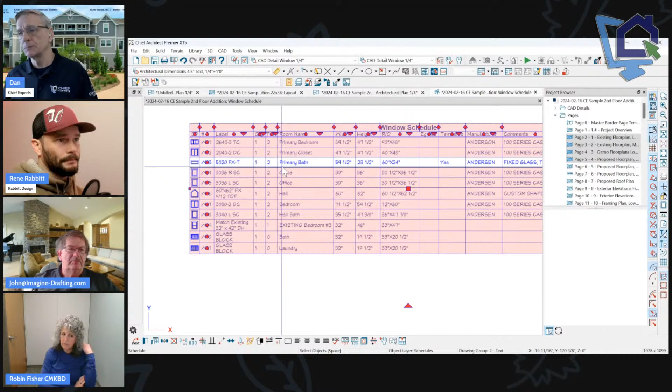Great point - does it? So if you have that checked and you have the floor column set in there, if something's on the second floor, it's going to give you that item separately. Which is probably good, so you can have items on different floors. I've got the floors, and now I've also got the room labels on my column. That's another thing that will sort it out, because now it's not similar anymore.

Did they add that? One's in the hall and one's in a bedroom - I never noticed that before. But that's just a matter of adding - you can go through this whole list of different things you want there. There's so many reportable things you can put on it. It's crazy, yeah, it's way crazy.

So I do the rough opening size, so be careful with your rough openings. I need to go back and turn egress on some of these - egress and tempered. That's a matter of, like this bedroom here - let's see, which one is it - this one should be marked egress.

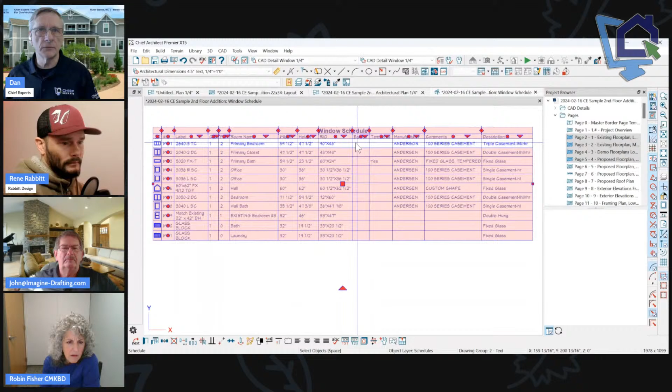So what I'm going to do is click here on my schedule, and click on this icon down here - you'll see you have another open item icon. That will open the item from the schedule. So now I could go here, and under options, I would just say that's going to be an egress window. Now, because I missed that earlier, it says egress yes. So that shows up on my plan.

Same with tempered. Then, of course, the other last three columns are based on the object information - comments, description, manufacturer. So those are the items you can type in for each item in your plan. I have those columns turned on the schedule, so this is exactly what I want for this type of schedule. It works good for me.

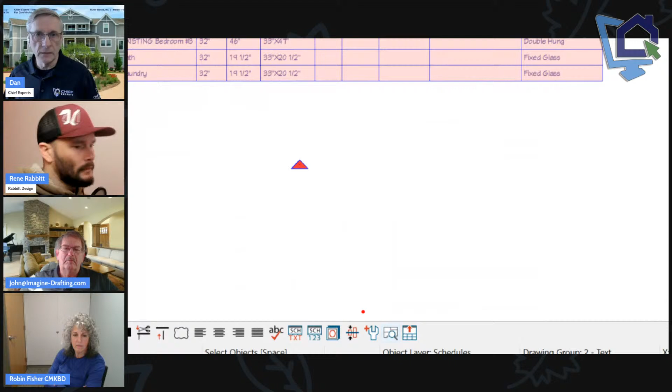I just wanted to show you that you have more options available. Another thing you can do from a schedule is find the item in your plan by highlighting the item in the schedule and clicking this icon. If you have group similar objects, it'll find and highlight all of those items. So here you see I've just done that, and now I found where it is in the plan. Sometimes you'll have things in your plan and wonder, where is that? So this makes it really easy to find.

Alright, I think we're done, but let me just say one more thing. One thing people forget, or maybe don't necessarily know, is you could do a roof schedule and hardware schedules. If you're doing any of the engineering on your plan, you might want that hardware schedule set up so you're showing your Simpson ties and all that stuff. And the roof schedule can show things like surface area, projected overhang, pitch, all that.

Lately I've been doing this too, where I'll bring in a window. If I know the series of windows, I'll just highlight which windows we're using, so I have all the information right there, which is kind of nice.

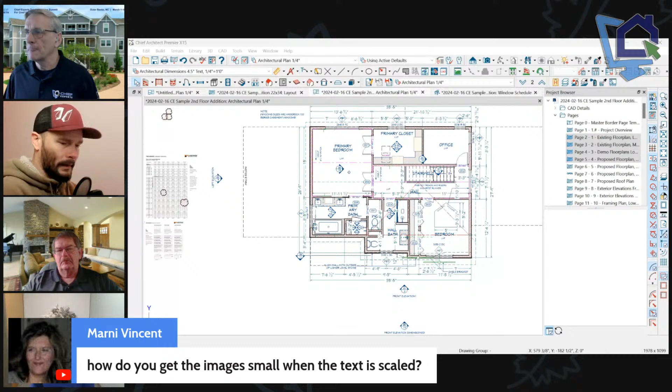Answer this question for schedules: how do you get the image smaller? We have three different methods for scaling. A lot of that's in the schedule designation itself, or you can grab the column and shrink the column itself, depending on what you have set up in your schedule. You just grab this diamond up here, and that makes the columns wider, which of course makes the image bigger. So you want to do that to scale it down to a more reasonable size.

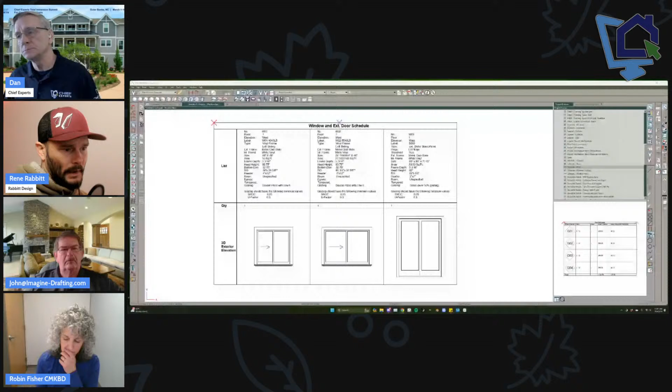I found just a small image is more than enough to show on a schedule. I don't know what you guys think. It doesn't need to be big. But mine shows big, and I cover a whole page with it. This is my window schedule, and of course, you charge by the page, so I get that. Just kidding, that's funny.